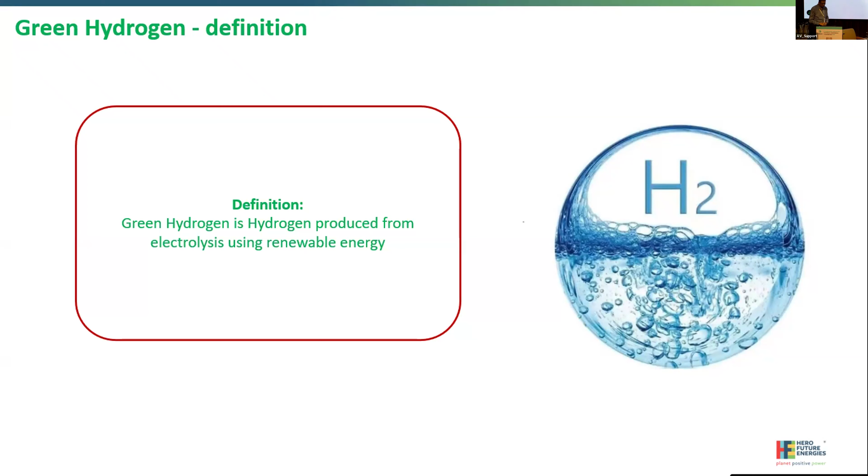As I said earlier, CO2 emissions have been rising, going up and up. As more countries economize and grow economically stronger, especially large countries, China is already one of the biggest emitters of carbon dioxide. USA is one of the biggest too, probably first or second. India is the third biggest emitter of carbon dioxide. And as more third world countries come up the economic ladder, you'll find CO2 concentration is going to keep going up. So there's a very urgent need for every one of us to be responsible and ensure that we don't blow up the whole atmosphere by putting in a lot of CO2.

So why green hydrogen? As I said earlier, green hydrogen is basically for climate change mitigation, because the climate is warming up, that's one reason for it. Another is decarbonizing hard to abate sectors, a lot of industries like steel, petrochemical plants, refineries, they use a lot of hydrogen, and that demands a lot of fossil fuel to make that much hydrogen, which is something you cannot keep doing forever.

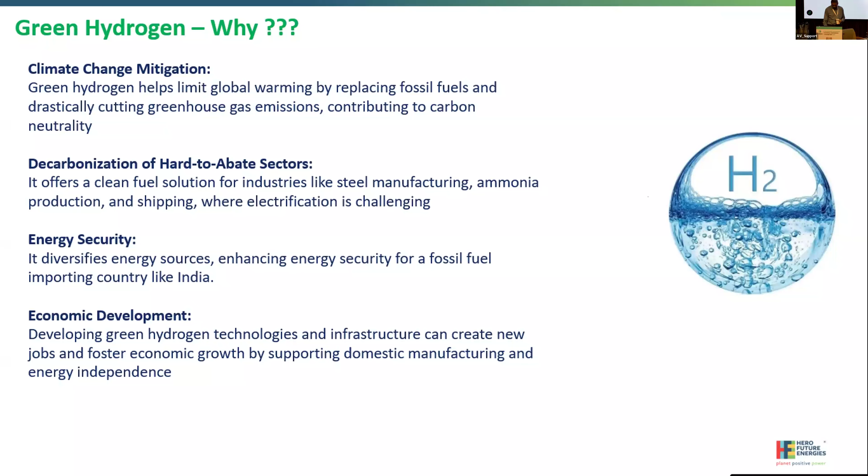India historically and geographically has a lot of advantage in producing green hydrogen. Unlike Germany, countries closer to the equator receive more solar radiation because of how sunlight is targeted. Countries near the equator traditionally get higher solar radiation in kilowatts per square meter, so they can convert this energy into electricity much more efficiently than countries further north like Norway or Germany. So per square meter, we generate more energy from solar light than countries elsewhere. Countries like India, the Middle East, parts of Australia, and Chile have good solar radiation, making them inherently advantaged in producing green hydrogen.

So we are lucky that we are doing well in this. We have good sunlight, so we can do very well in this particular context.

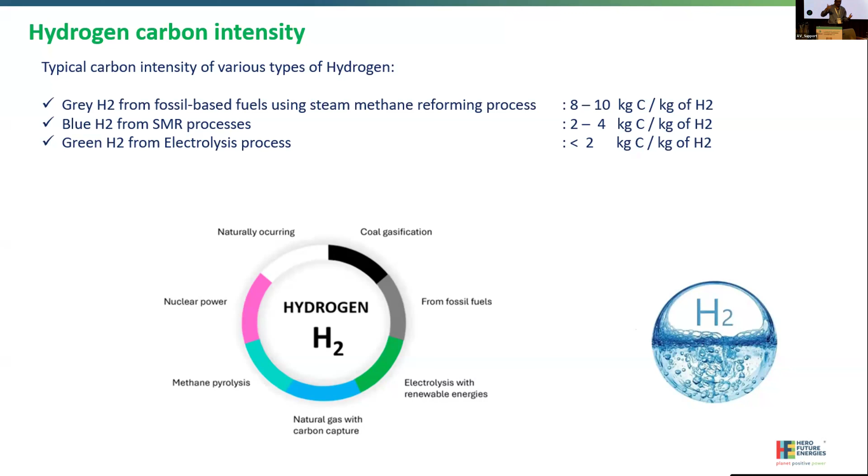Green hydrogen production is done using the electrolysis process. Typical consumption is about 55 kilowatt hours per kg of hydrogen. Major manufacturers are Siemens, Thyssen, John Cockerill, Peric, and Envision. Mainly Europe and China are the biggest manufacturers of electrolyzers.

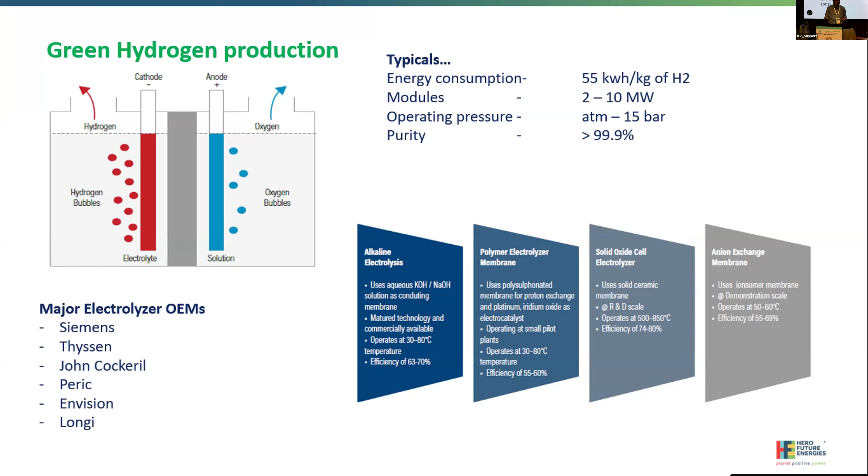The purity you make is pretty good, 99.9% hydrogen delivered when it comes out of the process.

This is basically the trend of, I would say, total hydrogen production, not just green. Right now we are in the range of close to 90 million tons per year, a huge volume.

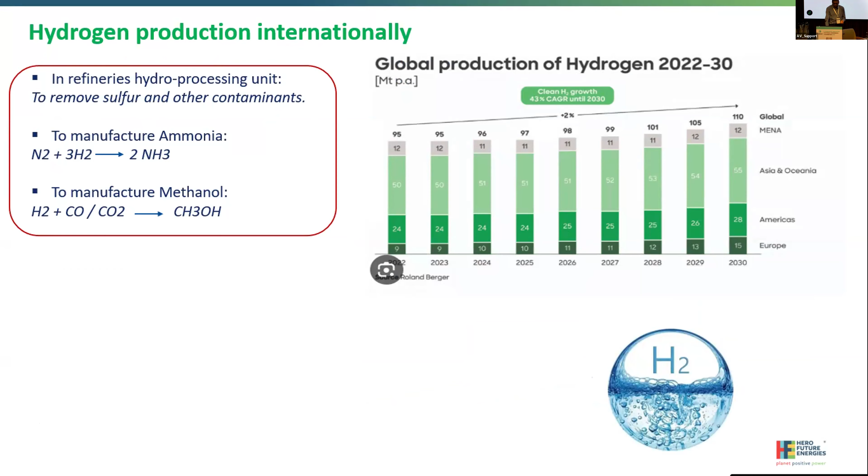Sectoral uses of hydrogen: current consumption is close to 6.5 to 7 million tons in India. Roughly half is used in refining and petrochemicals, and the balance in ammonia. Ammonia, NH3, contains one part nitrogen and three parts hydrogen. We expect demand to be pretty high, especially from the fertilizer sector, reaching close to 11 million tons.

We want to make about close to 5 million tons of green hydrogen every year in India, that's the target.

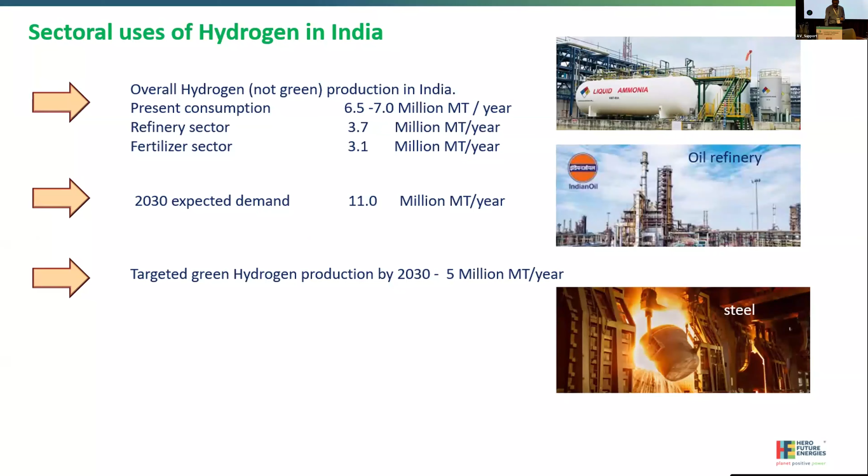This is called NGHM, the National Green Hydrogen Mission, formed by the central government. They are supposed to determine all the policies to encourage use of green hydrogen in every sphere of industrial activity. I'll come to it later on.

The key target sectors for green hydrogen include replacing the hydrogen used in the ammonia sector with green hydrogen. The government has recently launched tenders for private players for green ammonia, and they've been successful. We are going to produce roughly 750,000 tons of green ammonia by the end of this decade, 2030.

There have been tenders in IOCL refineries to use green hydrogen instead of conventional hydrogen, so there is some action on that. Some refineries, especially Digboi and Panipat refineries, have bid for hydrogen tenders. We are going to replace steam methane reforming with green hydrogen.

One of the most attractive sectors here is steelmaking. Conventionally, steel production uses coal to take the oxygen out of ferric oxide using carbon, producing CO2 which comes out as atmospheric gas, and then you get steel. Here, you use hydrogen to do the same thing, taking out the oxygen from ferric oxide to get steel. That's a completely new technology being developed. We are trying to convert many steel plants in India using this DRI process.

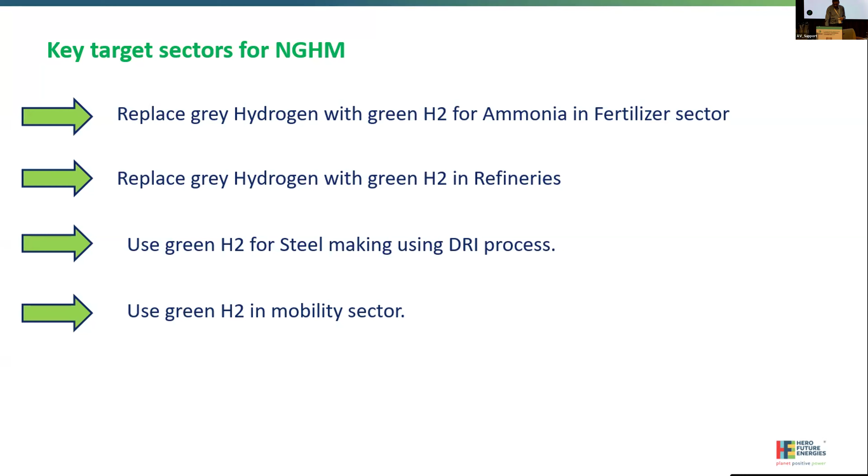Now there are a lot of challenges. There's a lot of cost differential between green hydrogen and gray hydrogen. The difference is nearly $3 to $3.5 a kilo. Gray hydrogen costs about $1 a kilo, and green hydrogen costs about $4.5 a kilo. It's a big difference, making it very difficult for most people to adopt green hydrogen. You can't spend much more money to buy green hydrogen just because somebody has told you to buy it. So that's a challenge we're facing in this economy.

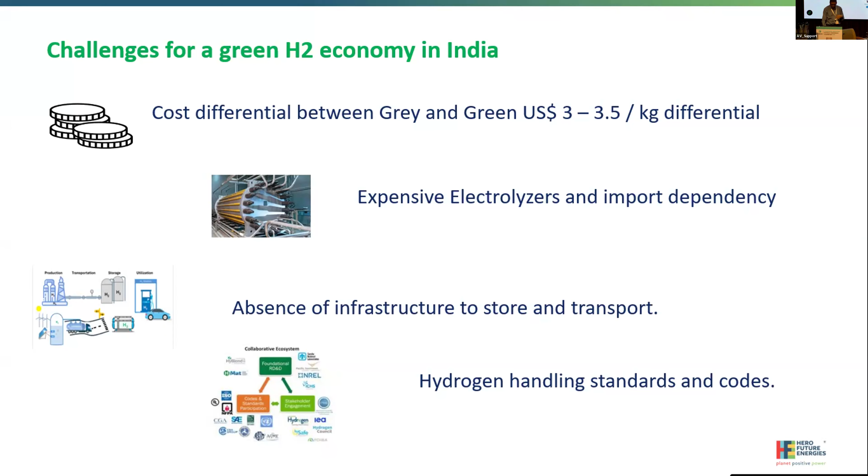Expensive electrolyzers mean you have to depend on Europe and China to bring them in. There's an absence of infrastructure to store hydrogen. We don't have transport and all, and we don't have much in terms of standards for how to handle hydrogen.

I'm running short of time, so let me just take cognizance of that and give myself 2 minutes. The government's policy is to decentralize hydrogen. They're putting up hydrogen hubs at ports like Tuticorin, Kandla, and Paradip. There's a lot of infrastructure being built. The government is sponsoring storage of hydrogen at some of these ports, so that people can use government-sponsored facilities, making it more effective and much cheaper for people.

We are allowing people to manufacture electrolyzers in India, and they're giving a lot of incentive for this, nearly 4,500 crores. We are encouraging a lot of pilot projects, for example in the making of steel—putting up small pilot plants in India to make steel using hydrogen. These are all innovations the government is encouraging, so that it can be adopted 5 years down the lane and really implemented at a practical scale.

Sorry. Preparing regulation and standards for handling hydrogen—that's what I already discussed, along with the replacement of gray hydrogen with green hydrogen. In the coming future, a lot of people who use city gas for cooking and similar purposes could see hydrogen blending happen, to remove natural gas, which is a fossil fuel.

Right now, a lot of green ammonia—ammonia is a very important user of hydrogen—so we are going to see green ammonia coming in the coming days. These tenders have been floated and have been successful. Nearly 600,000 tons of green ammonia tender has been floated, and you're going to see a lot of green ammonia coming into India. That's very good news.

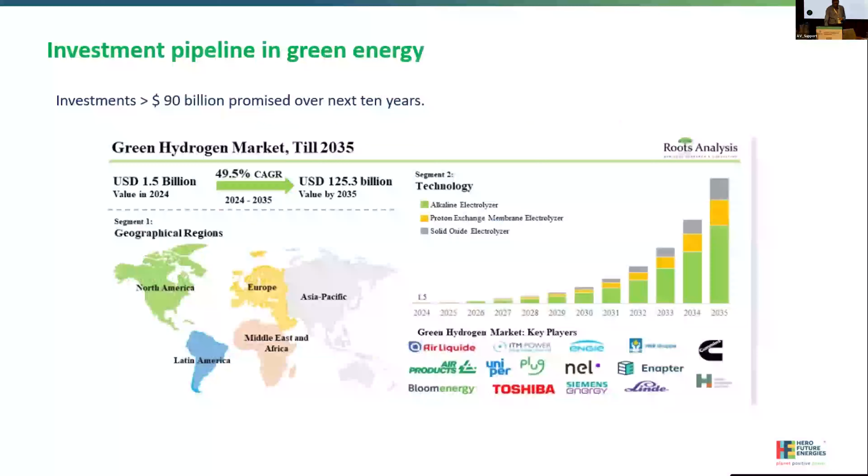So that's a small part we have played in our role, but we have very big ambitions to build very large green hydrogen plants in the coming days, which will probably help the country alleviate, to an extent, the carbon dioxide we are putting into the atmosphere. I'm ending my note with this. I'm sorry for exceeding time, but there's a lot to tell and little time to speak on. Anyway, I hope I have conveyed the message to an extent. Thanks for that.

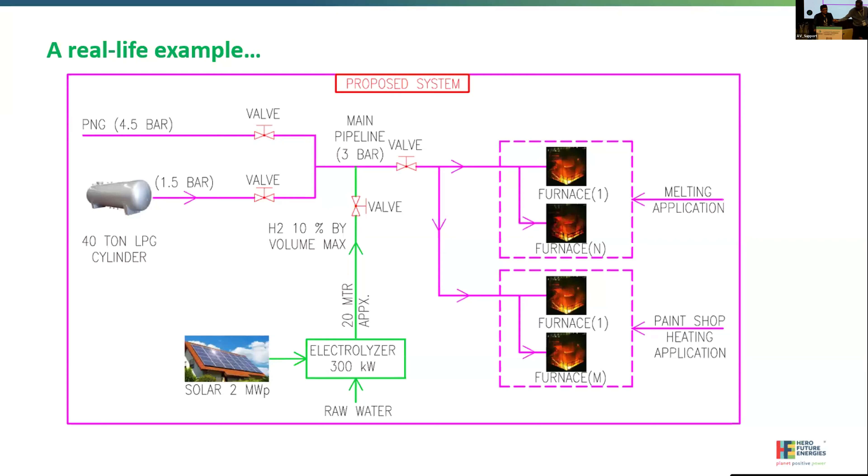Thank you, Mr. Sandeep, for touching upon the various aspects of green hydrogen, right from gray hydrogen to blue hydrogen and now green hydrogen.

The United Nations has declared 17 sustainability goals, and one of the goals is climate change. Carbon dioxide emissions do affect climate change, and as rightly said, by 2070 India is poised to be a net zero economy in emissions. That will curb the temperature rise, which is expected to be another 1 degree rise by 2060—that needs to be curbed to at least 0.5 degree.

These sustainability goals definitely will go a long way to ensure that we are not seeing any adverse climates. In recent years, you must have seen very extreme climate changes in India, and specifically we in the equatorial zone are very much affected by climate change. So thank you, Mr. Sandeep, for an enlightening talk on green hydrogen utilization, and for setting an example by using it in your own industry.